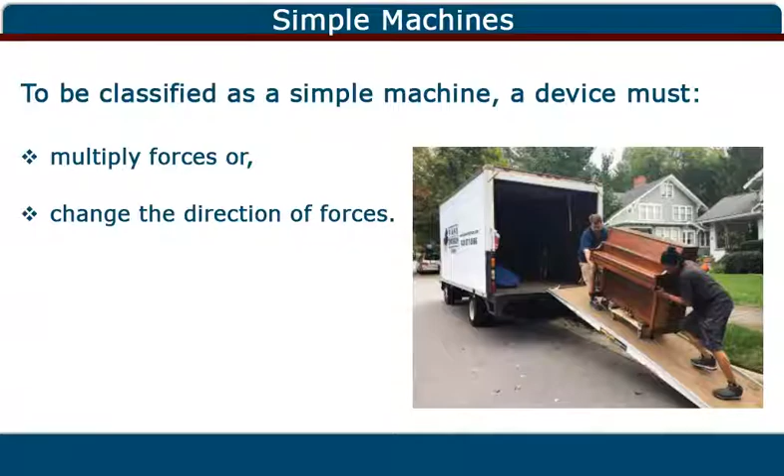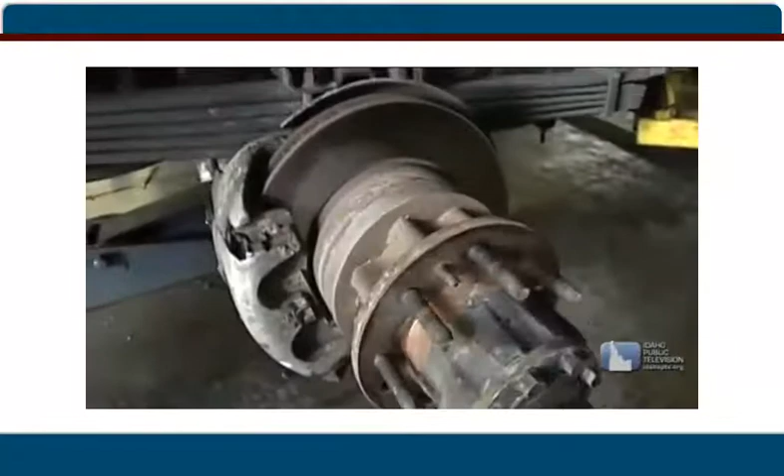Simple machines help us make better use of our muscles to do a thing called work. Don't be fooled by their name. Simple machines help create things that are very complex. A simple machine controls the direction of the force or energy we apply. They're very handy because they make many movements and jobs easier to do.

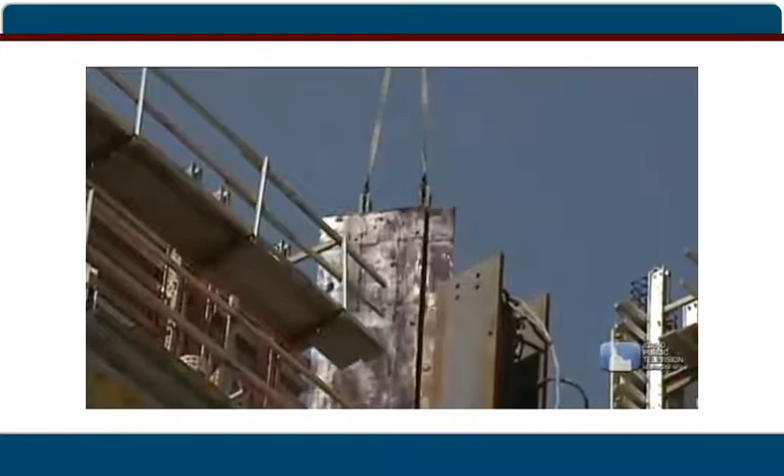Simple machines work either alone or in various combinations. They make up most of the gadgets and mechanical devices we use every day. The 6 simple machines are the lever, the pulley, the wheel and axle, the inclined plane, the wedge, and the screw. The lever is the oldest simple machine.

It's probably best described with a seesaw. Every lever, every seesaw, has a fulcrum. That's the point where the seesaw moves. It's right in the middle. The way a lever works is downward motion on one end results in upward motion at the other. Scissors are also a good example of a lever.

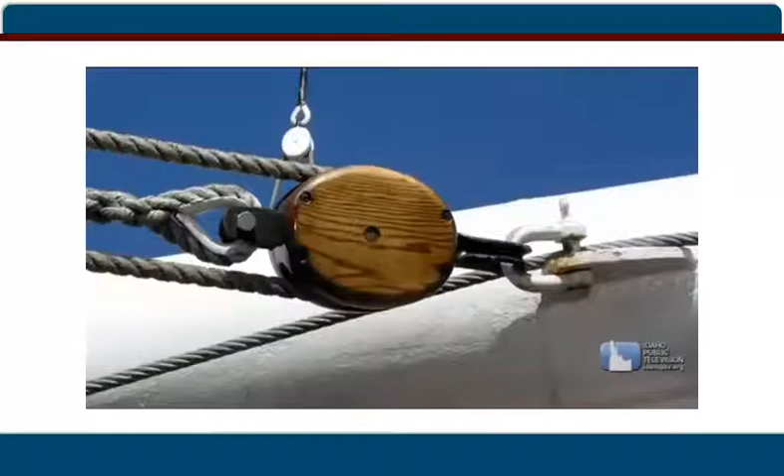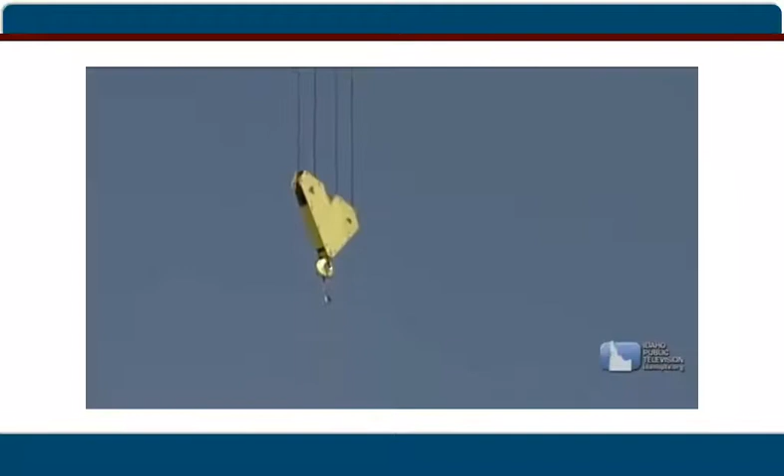Next are pulleys. There are pulleys in cranes and elevators, and your fishing pole has a pulley too. A pulley helps you move something up or down. It's a special wheel with a rope around it. When you give the rope a tug, the object at the other end can easily be lifted. If you combine several pulleys, you can lift something that normally you'd never be able to carry.

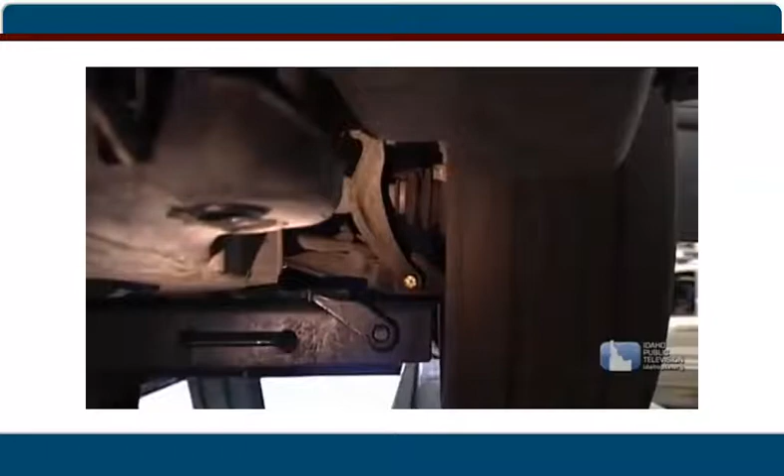The wheel and axle is best described with a good look at the tires of a car or truck. A wheel and axle rotate together. The wheel is locked to a central axle. When one turns, they both turn. The wheel and axle allows you to move the heavy car or truck. Another wheel and axle is a knob on a radio.

The most simple of the simple machines is the inclined plane. It's a sloping surface used to lift or help move heavy loads with little effort. A wheelchair ramp is a good example of an inclined plane. It allows someone to go inside without trudging up the stairs. With an inclined plane, even though you're going a longer distance, it takes less effort to move.

Next is the wedge. It's shaped a little like an inclined plane. Have you ever seen someone chop wood? They're probably using a wedge between the axe and the log to help drive a force into the wood and split it apart.

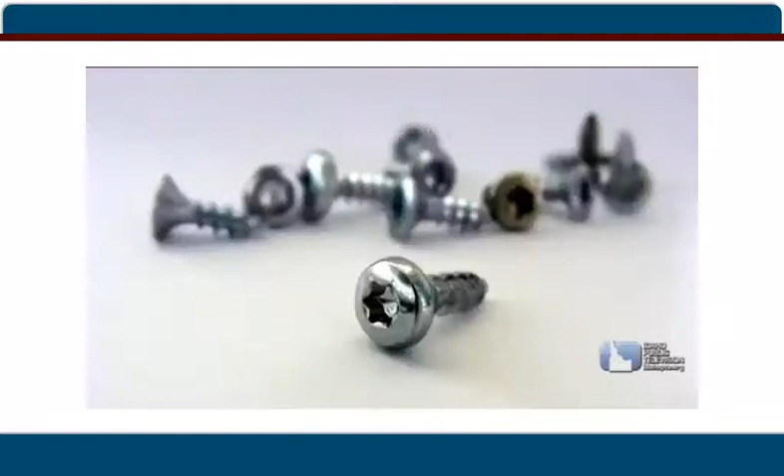Another simple machine is the screw. Anytime you take the lid off a jar of peanut butter, you're using it. A screw is a long incline with a central core and a groove wrapped around it. Every time you screw off the lid from a jar, you're seeing a simple machine in action. Screws are also very useful to hold things together.

It's hard not to find examples of simple machines. They've been around for thousands of years. Humans used simple machines to build the Great Pyramids. We use them every day, in cars, schoolrooms, everywhere. The bottom line is that simple machines are tools to make work easier.

So first let's define what mechanical advantage is. There are 2 kinds of mechanical advantages that we are going to learn about and study. Both of them are ratios. One has to do with forces and the other has to do with distances. There are also 2 other terms that you need to know and understand. One is that of resistance and the other of effort.

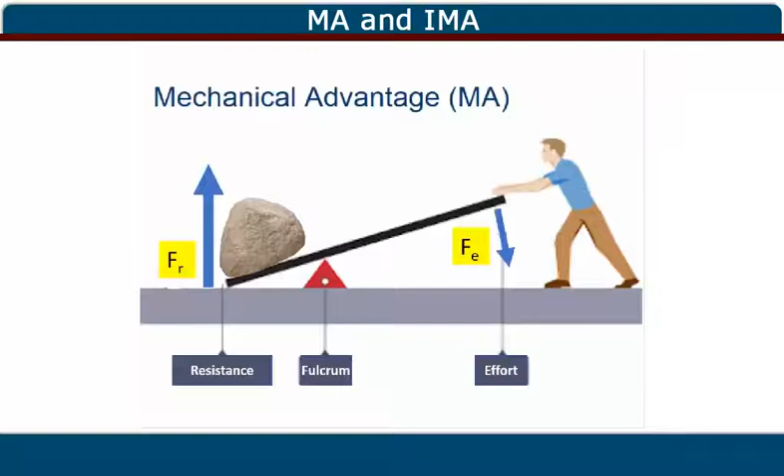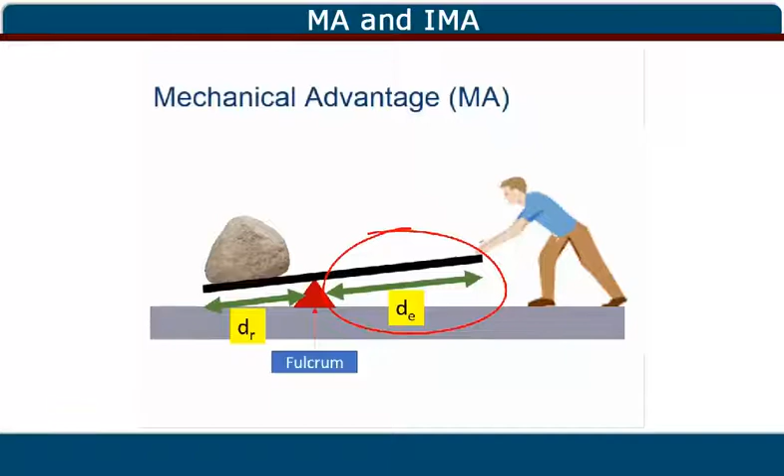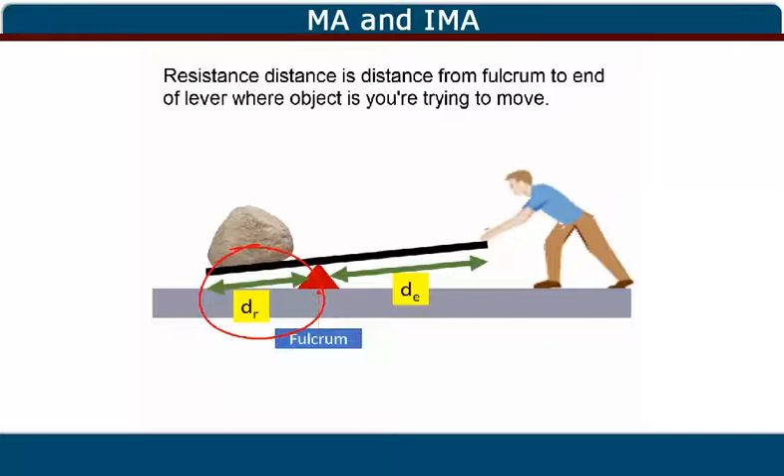That's the resistance force. The effort distance then is, in the case of a lever, which we will see, the distance between the force that you impart and the fulcrum on that lever. Well, when it comes to mechanical advantage ratios, we say here 1 is the magic number, and I'll explain what that means.

Typically, what we're going to find is that the mechanical advantage, or MA, is greater than 1. In most machines, we're going to find that. What does that mean? That means that less effort force is required to move that object or do that work. But what we're giving up is greater distance. So we're going to have to push or pull that resistance force a greater distance.

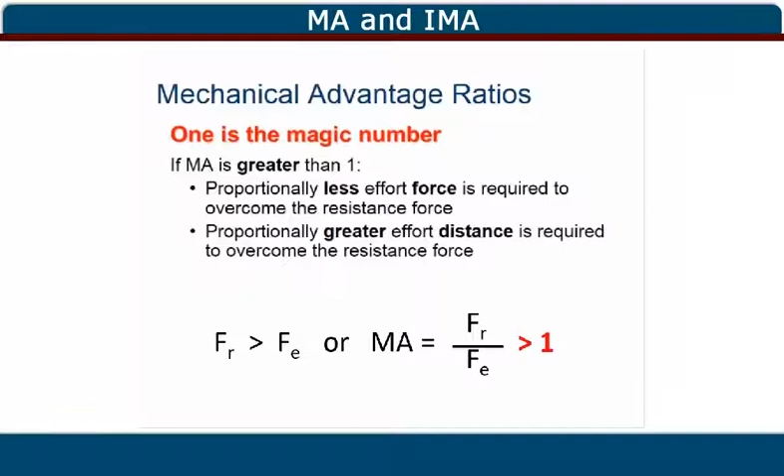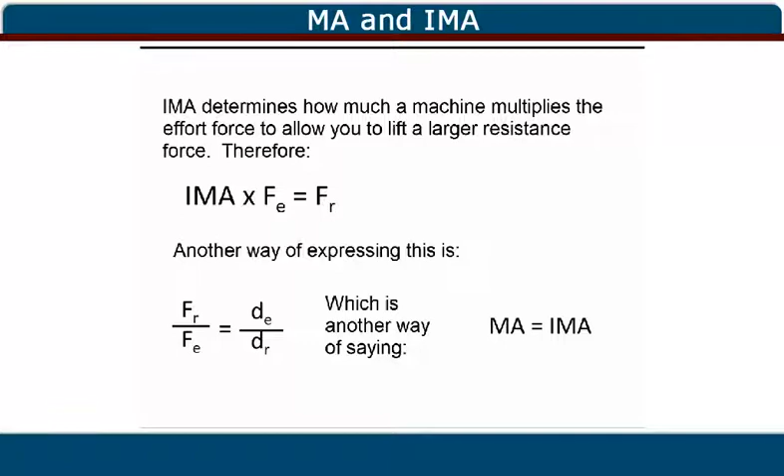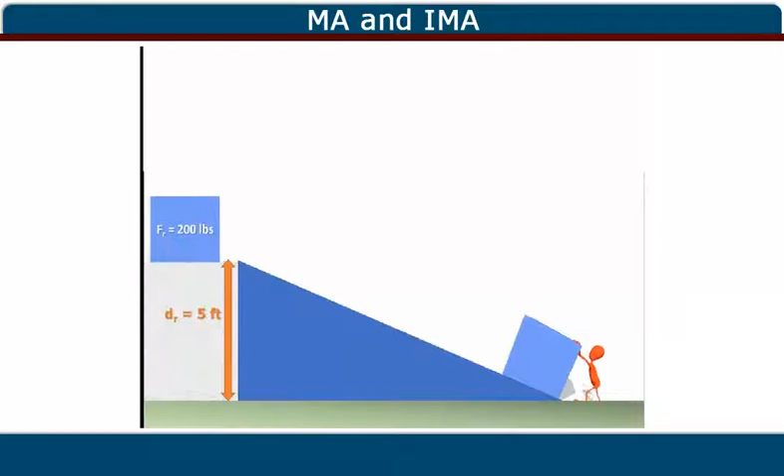So let's take a look at an example. Here you see 2 ways to move a box to the top of a ramp. You can lift it straight up, or you can slide it up the ramp.

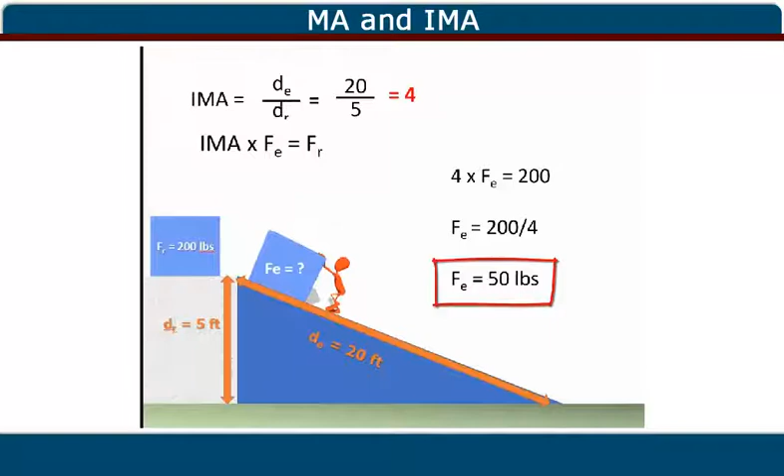But what does this really tell us about what's going on? When we talk about forces, in this case, it means that the magnitude of the effort force is 4 times less than the magnitude of the resistance force. So let's take a look at this. To lift the box straight up takes 4 times as much force as if you were to push that same box up the ramp.

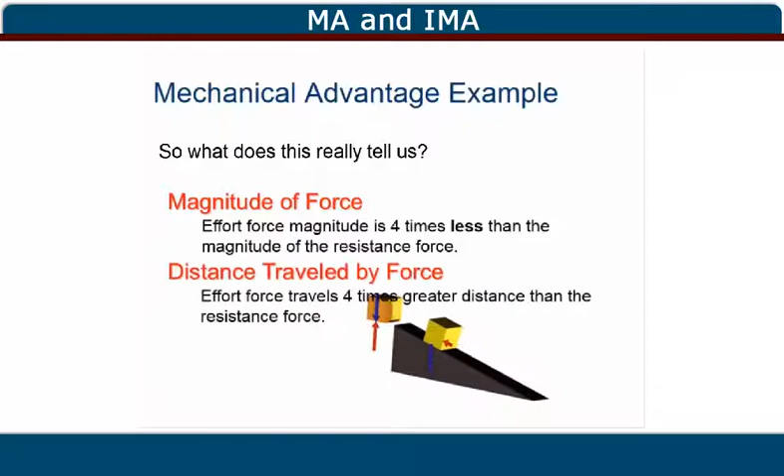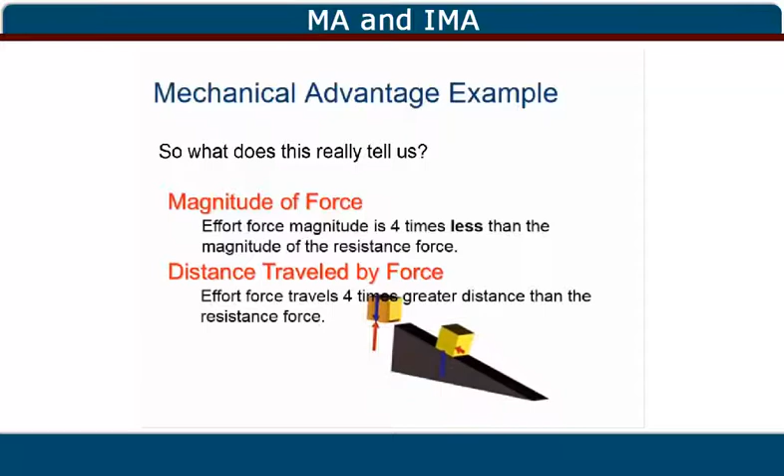But we also give up something. We give up distance. In this case, if I pull it up, I'm pulling it up a distance 4 times shorter. If I'm pushing it up the ramp, I'm pushing it 4 times the distance, roughly speaking.